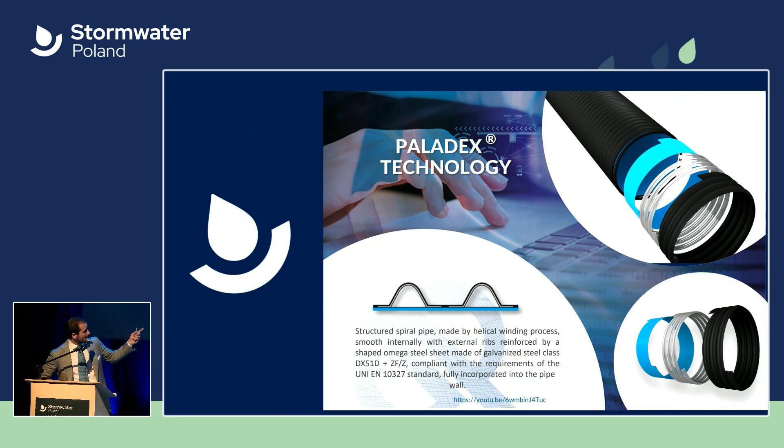Our company produces innovative technology which combines steel with polyethylene. The core of the product is made of a spiral omega-shape galvanized steel profile, which ensures a high ring stiffness with an elastic modulus 200 times more than plastic. Then we have an inner layer that ensures contact with the fluid, since plastic is still the best material to get in contact with the fluid in terms of low abrasion and chemical resistance. Then we have the external layer, which is polyethylene, to preserve the steel from corrosion, meaning durability of the product.

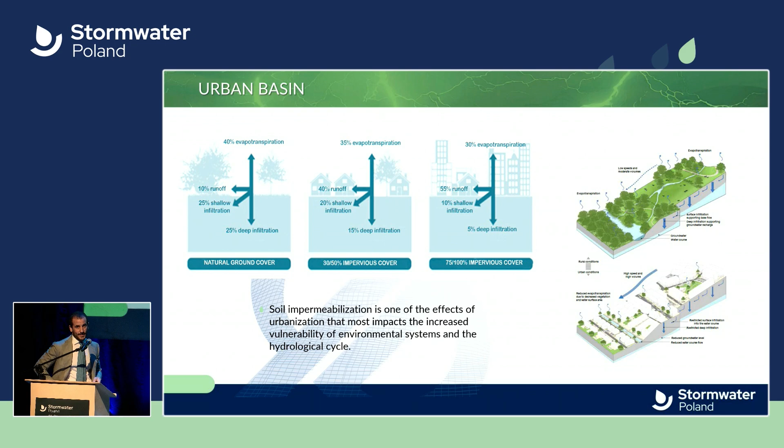The scope of our presentation is to talk about urban drainage systems. We have been seeing a lot of similar slides during these days, so we well know what we are talking about, and we well know the problem we have to face.

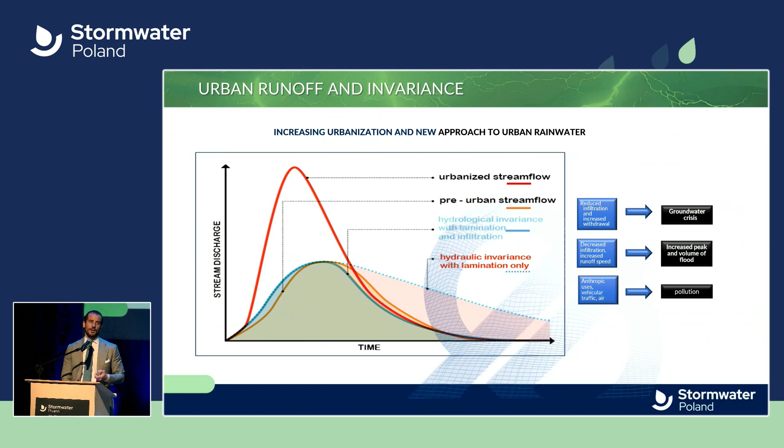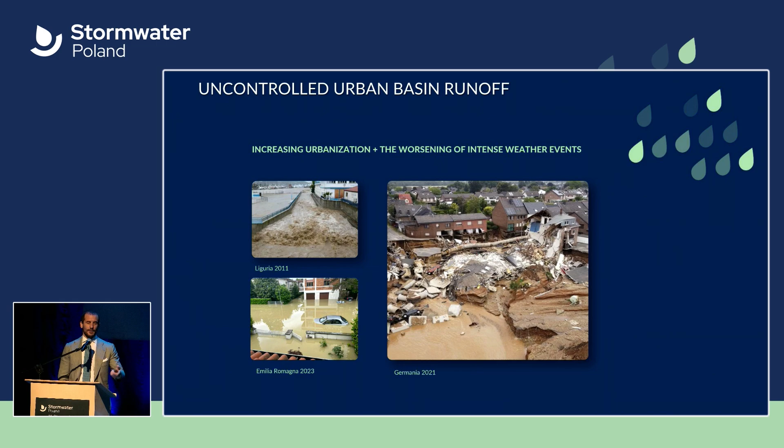But this scenario is what we faced like 10 years ago. Now we have a different scenario, one in which we have to face urbanization plus climate change. This slide shows some events that happened a few years ago. We did not even need to update it, since every month in Europe and in the world we have events like this. So what is the approach to solve this situation?

We have the traditional approach, which is hard engineering. Hard engineering has been the guideline we have followed through decades, meaning big hydraulic works like dams, rivers, spillways, big basins, big pipes in the city. It has been working a lot, but can we do it now? No, because we don't have any more greenfield area. Now we have to work in brownfield area.

So we have to switch to LID, low impact development. This approach is different: it considers every part of the city as part of the stormwater management, from the roof of a building to a parking area converted to green, to any other part of the city. But can we switch from one approach to another? No, exactly the same way that we cannot switch entirely the actual source of energy to solar panels. We all want to switch to solar panels, but we cannot; we have to mix both of them. So what is the role of a producer or designer?

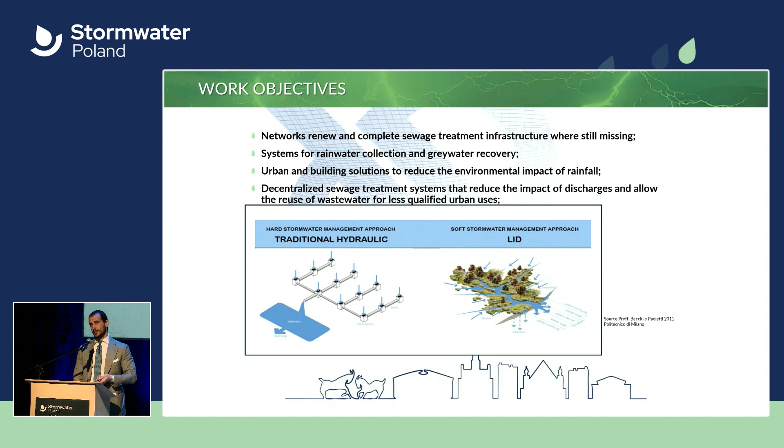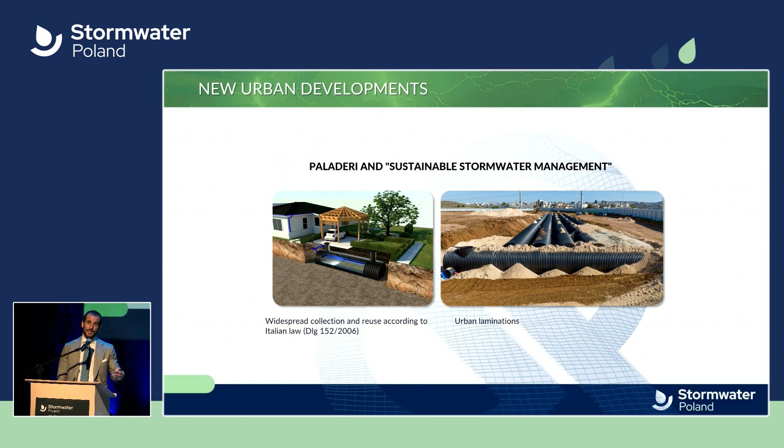We need to find a solution that can fit in both cases, hard engineering, soft engineering, greenfield, brownfield, and most of the time something in the middle. We have to find solutions for a small new villa, for urban lamination where we have space, and for areas where urbanization is already done. You have to find versatile products for versatile solutions.

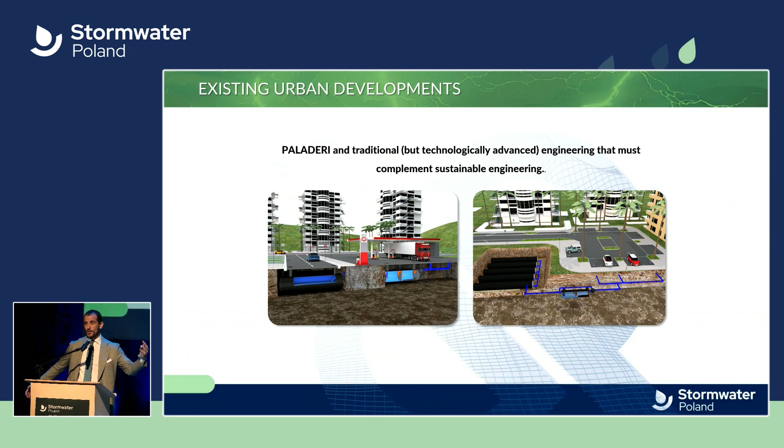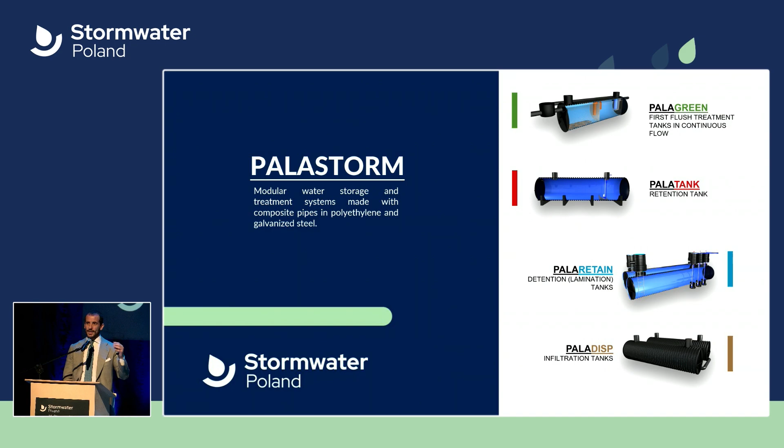You cannot bring big volume into the center of the city because you don't have space, or space to bring a big crane to move big concrete volumes. So you have to find different solutions. This line, Palastorm, combines different products fit for urbanization, from sand and oil separators to detention tank, retention tank, and dispersion.

The main characteristic of this technology is that it allows production of pipe from 300 millimeters to 3,000. This means any product can be produced in any shape. You can have 100 cubic meters with a small but longer pipe, or the same volume with a 3,000 millimeter pipe, so shorter but higher.

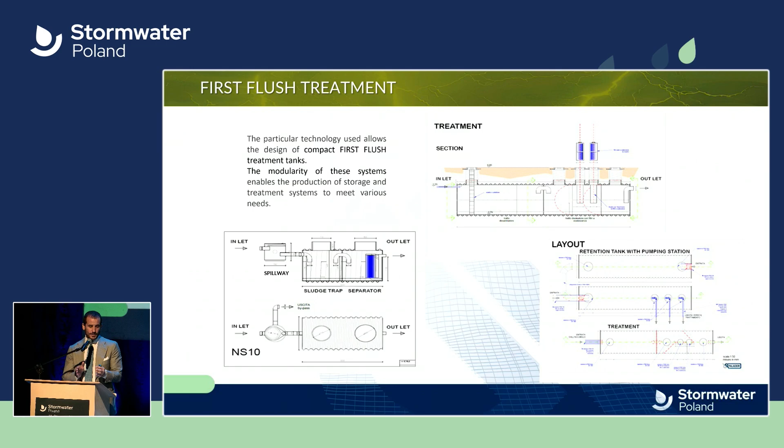But let's see what it means to bring this solution into major infrastructure, because in infrastructure we have the same environment. We are not building new airports, we are rebuilding them to match new standards. So this is one example.

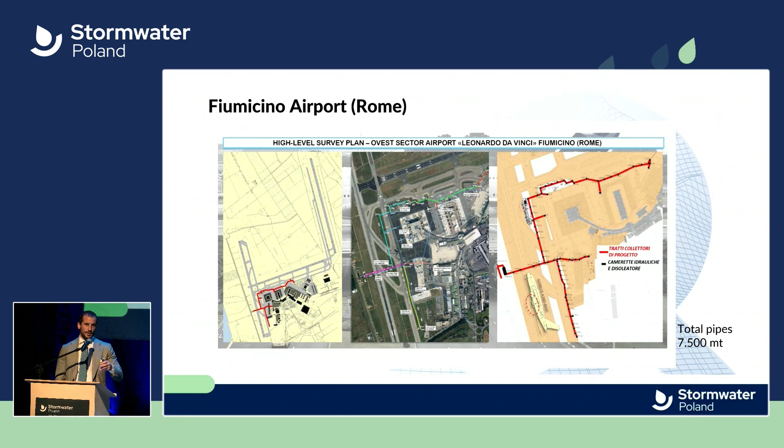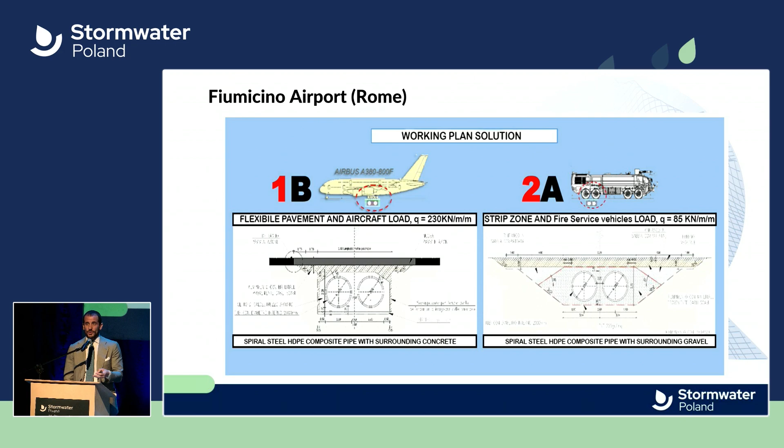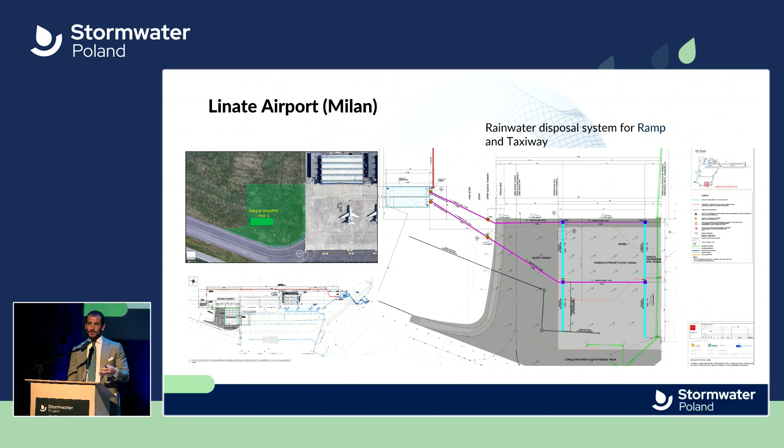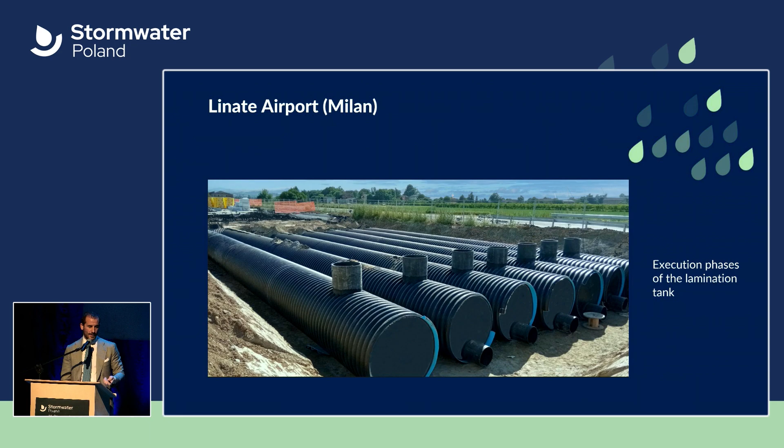That was the same situation for Linate. They had a new taxi area to build, but they had groundwater there. So what do you do? You cannot dig so much. They needed a tank with smaller diameter and different pipes connected in series, which solved the groundwater problem and allowed installation in 2 weeks.

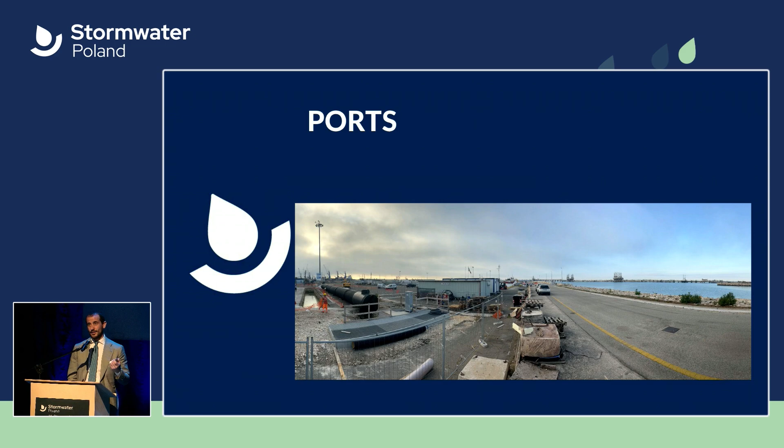Then we have another very aggressive environment: ports. Ports are similar to airports but with another characteristic, corrosion, because we're in a marine environment. At Cagliari Port, they had to build a new terminal area, so they chose SN20 pipe for all the network.

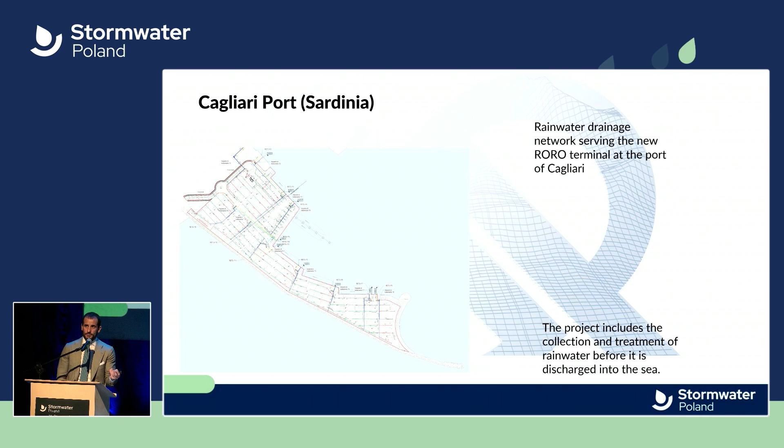But then they had a problem. The first design was made with a steel sand and oil separator. But how can you put steel in a marine environment? They found a solution first: build a bigger tank, waterproof in concrete, and put the steel separator inside.

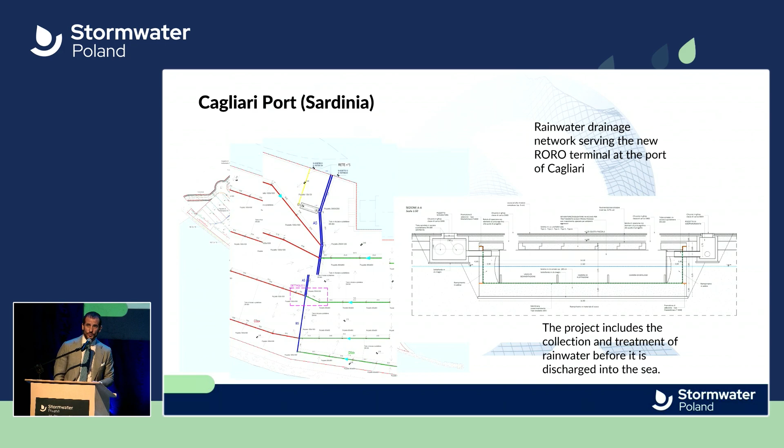Is this a solution? Yes, is this a solution? Is this the best one? Maybe not. If you have another kind of product that can ensure installation there with no risk of corrosion, you don't need to build concrete structures that are useless.

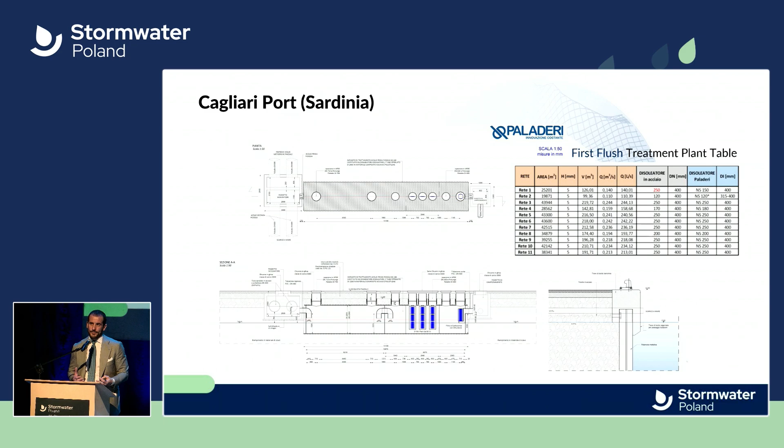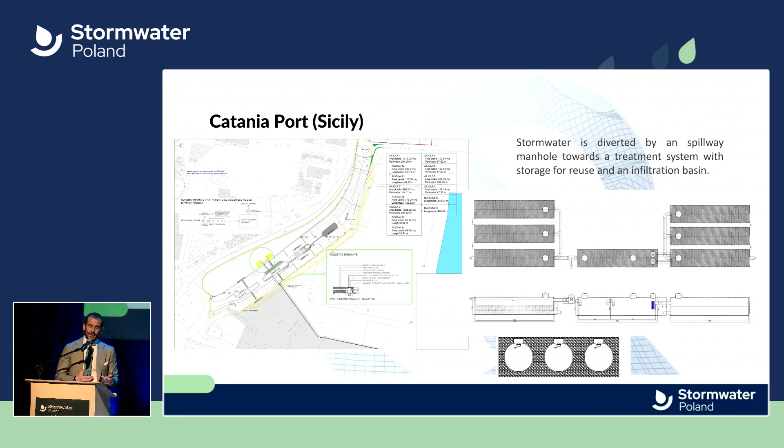Then we have another case, Catania Port. Here they needed a very simple system, doing infiltration and retention at the same time, with limited space. So we built this system, which combines in the center a water treatment plant, sand and oil separator, with a spillway before, a flow split chamber before. The water goes into the water treatment and then to detention tanks, which provide gray water that can be reused. On the left side, the second stream of water goes into infiltration to avoid flooding.

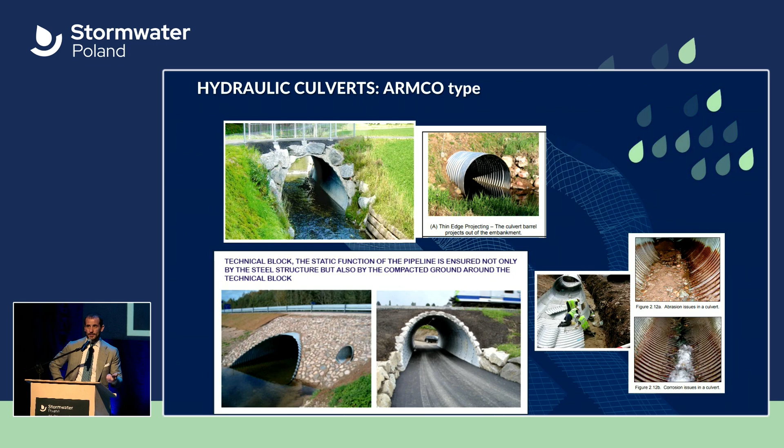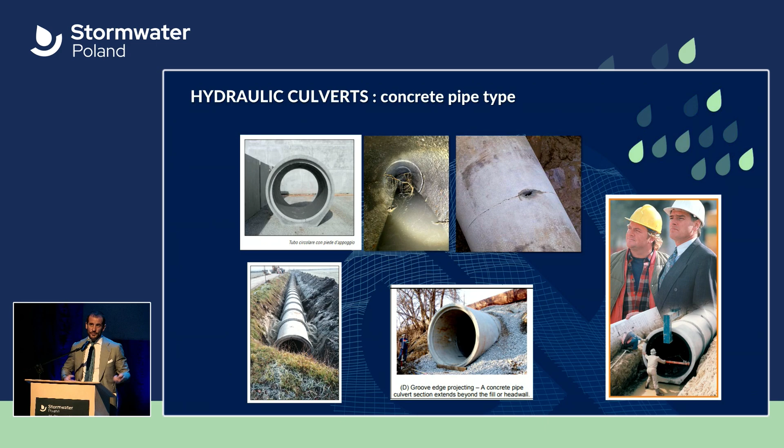Then we have the last infrastructure: roads and highways. In roads and highways, you often need to provide solutions under culverts to drain water. What are the solutions right now? ARMCO type, like modular steel pipe, or concrete. In both cases you need to build a concrete frame around it, which means cost, time, heavy transport, more trucks, and more pollution.

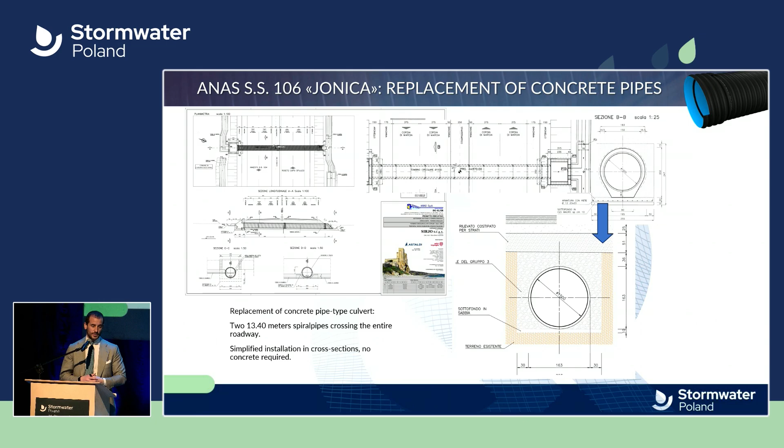If you had another solution, instead of 2-meter pipes, or steel that you have to mount on the side, you could move to one long pipe of 13.40 meters, which covers the whole culvert and can be installed one by one. This building site is Pedemontana Veneta, which, if I understood correctly, one of the former speakers also worked on for this tender.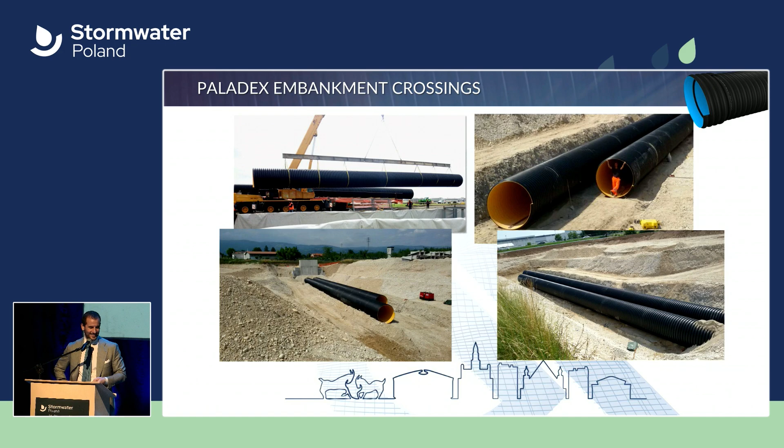So what is the conclusion? In the current situation we're facing, we all have a key role: producer, investor, designer. What we think is that there is no single best product in the market, because all products have advantages and disadvantages. What we should choose is the product that fits best to the solution you need. Thanks for your attention.